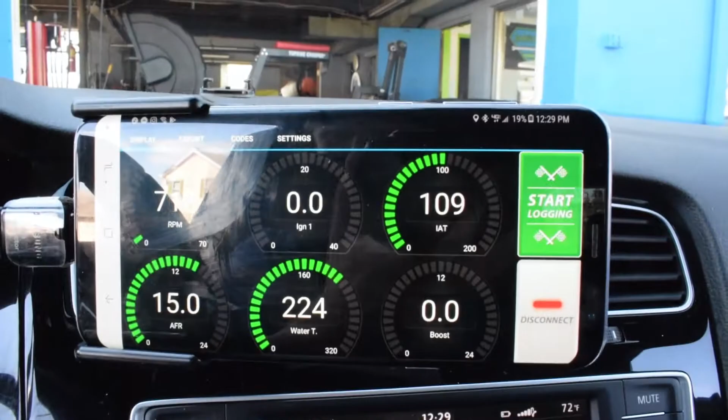So right off the bat, this is beforehand - I've been driving around, just a normal daily commute. So just sitting here, we're resting at about 110 IATs as far as resting goes. It is 72 degrees out, and now we're going to install the turbo blanket, and then I'll give you the afters on the IATs resting and my impressions.

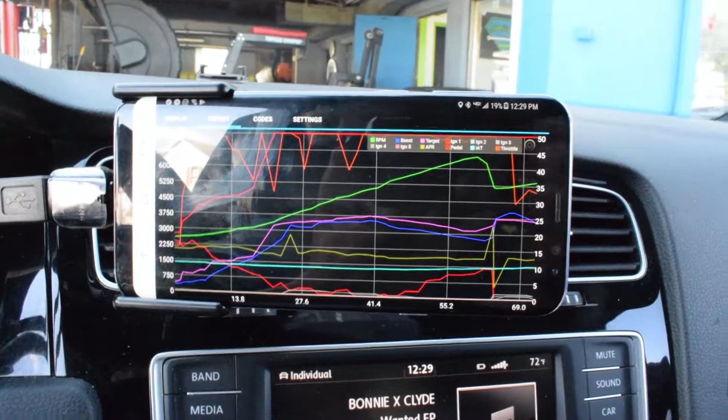But this is a log that I ran pretty much like 10 minutes ago when it was heat soaked pretty good. This is on my high boost map too, so this is the map that I'm going to be running at the track next, but I'll be with ethanol, whereas this isn't right now.

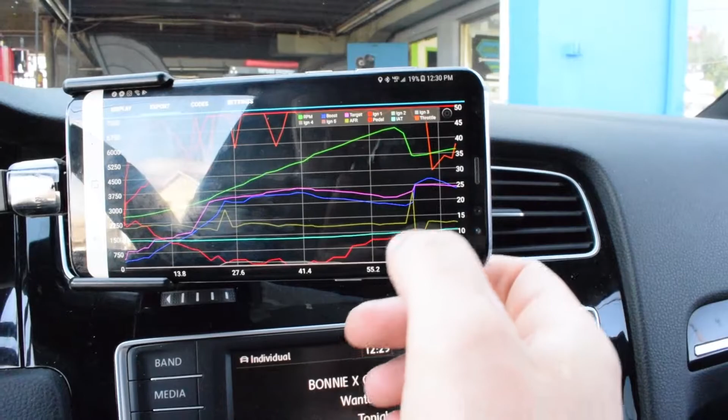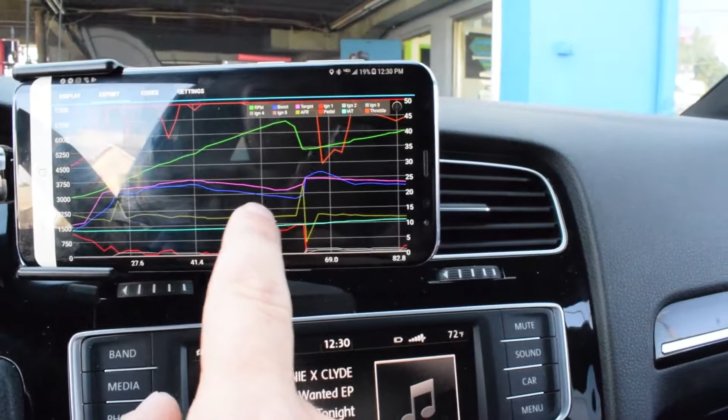So this red line is what we're going to use to determine if this turbo blanket helps out, and then the blue line here is the IATs. This was third gear and then fourth gear, so you can see some timing corrections, some timing pull, same thing going on here. But like I said, the car was heat soaked already, so I'm hoping the turbo blanket will alleviate some of the heat soak for multiple runs at the track.

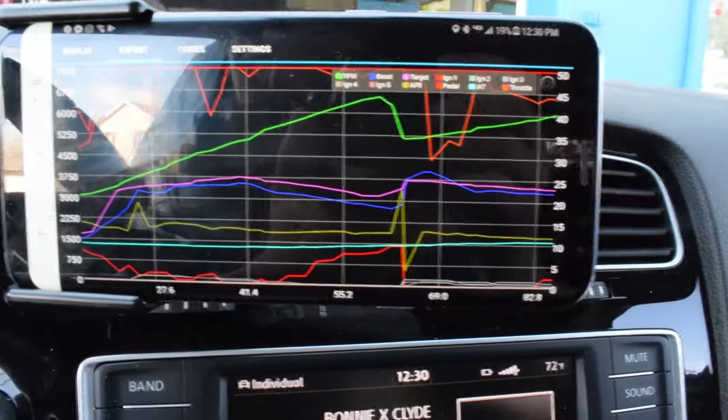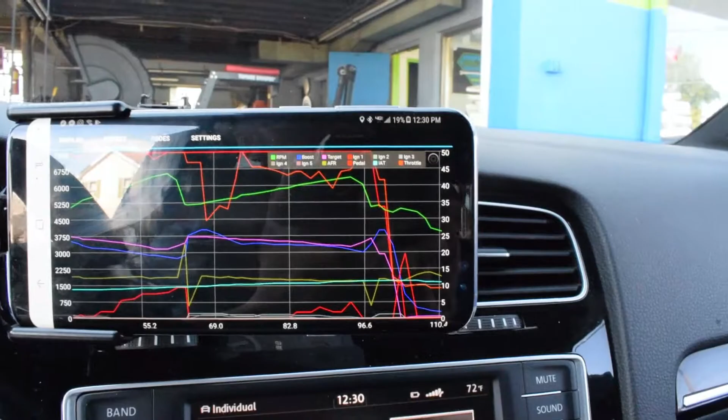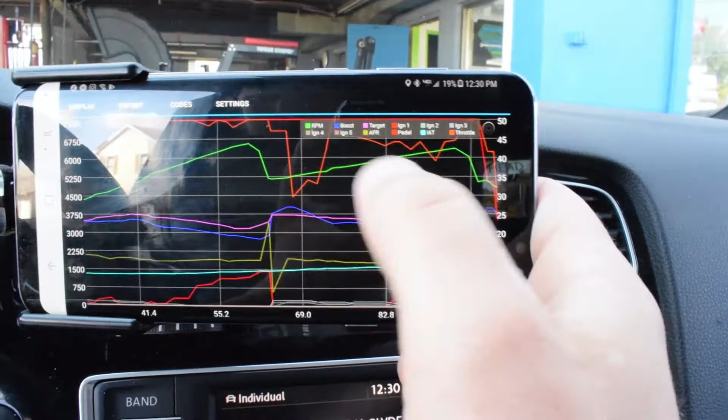I know that initial run it's not really going to change much, but if it'll help not get heat soaked - and also going into the winter, I plan to run this map all the time, at least until we get back into the 70s in the spring. So I want the turbo blanket to help out with commuting and keeping the IATs down throughout my whole journey, wherever I go over the winter. So let's see what it does.

So this is what the turbo blanket itself looks like from Forge. Definitely good quality make, feels nice and sturdy, good materials. So let's get it installed.

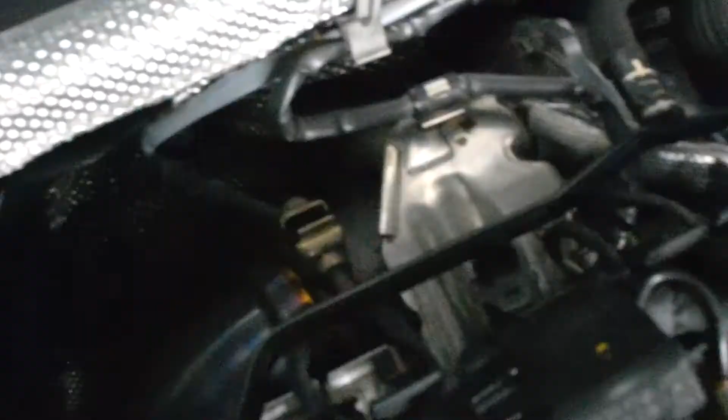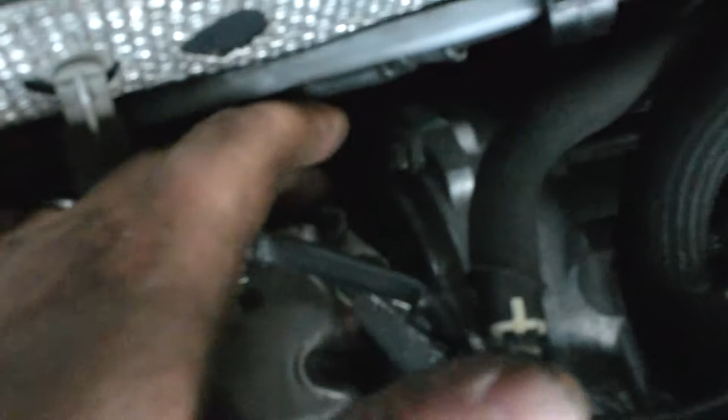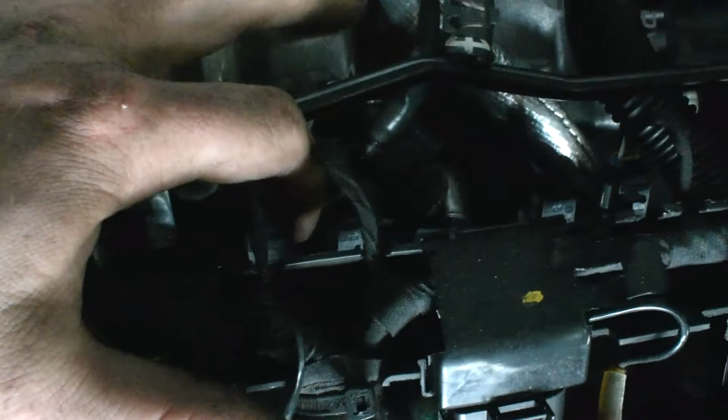Alright guys, first things first, I'm going to take off this heat shield. There's one bolt in front here, one bolt in front over there, there's a bolt right up top here, and then there's two kind of right down in here, so there's one down here, and then there's one in between these two plugs here. Alright, so heat shield's out.

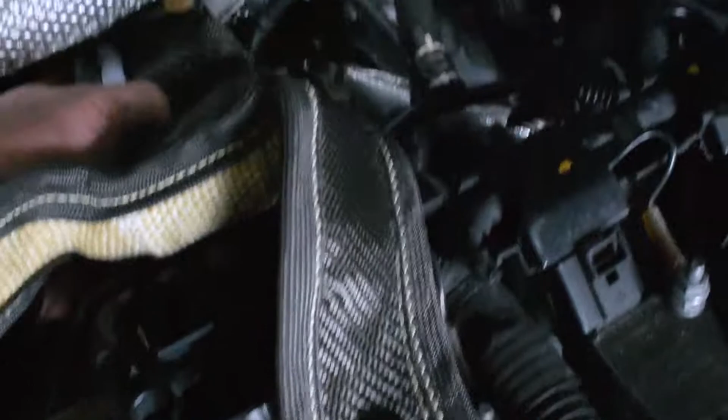Alright guys, so here's what the turbo blanket looks like. This snaps on right here. So what you got to do is you're putting this on first without that piece. You're tucking it back, and then these will go down and around the actual part of the exhaust that comes out of the engine.

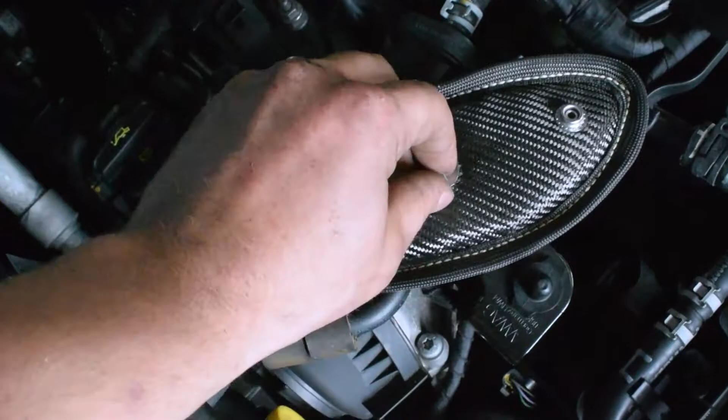So the exhaust manifold there, and then the other side will wrap around where the O2 sensor is, and you just push those down and under. Once they get under, then we're going to put this piece back on the snaps, and there's two springs that get hooked to here, and there's also one on the other side of this, so they'll get hooked together underneath.

So to make life easier, we're going to take out the O2 sensor up top, so we can get the full wrap all the way around without anything being in the way of it. So O2 sensor out, that way you can go right up to the edge of the exhaust manifold there where it splits on the Forge blanket.

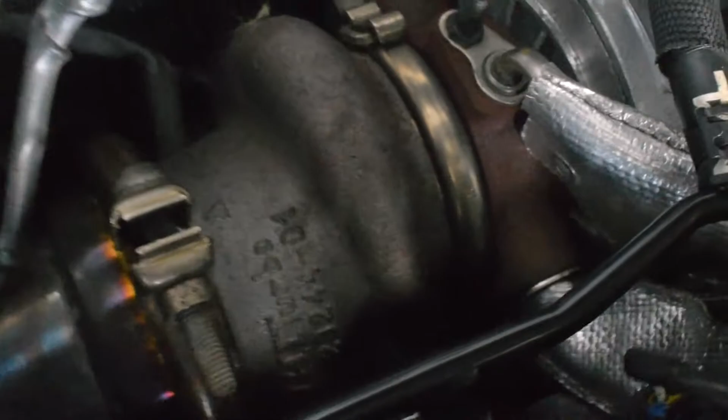Alright guys, so I have the blanket fed under. So I took out the O2 sensor. There's the split in the blanket, so we push that down here - one going on one side of the exhaust manifold that's coming out, the other going on the other side. Then on this side that's easier to get to, this side split, I put on the bottom piece that had the buttons on it for the bottom of the blanket, and then reached my hand down and under and connected it. So basically I spun this all the way forward as most as I could, so I could get under there and be able to snap in the other side of that bottom piece of the blanket.

So I've done that. Now I'm rotating back. I'm just going to get it fit real nice and snug, and then throw in the O2 sensor again, and that's it. It's done.

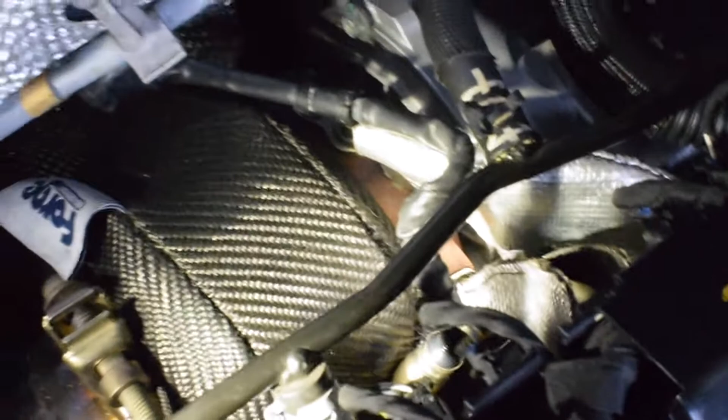So I got my turbo blanket in, and I got my O2 sensor back in. That was a pain in the ass to get back in because it's so tight now with the cloth in there, so just be wary of that. And then now what I'm going to do is move my bracket here, spin it so that I can actually encompass this too with the cover.

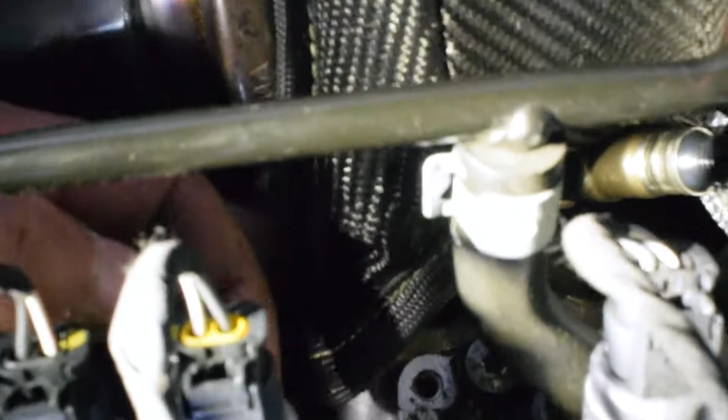Alright guys, so I spun my downpipe clamp so that, I don't know if you can see it at all, that's down there now. So basically it's running right next to the engine, so that way I can pull my blanket over so that it nicely covers the whole side as well.

And that's it guys, so that's on there. Just want to make sure everything's covered up, that's supposed to be covered up with it. And that's it, so that's on. Obviously you're not putting your heat shield back on, I don't see why you would. It's essentially doing the job for it.

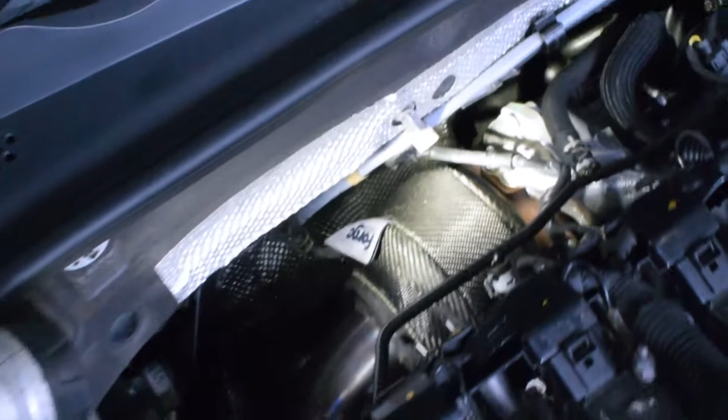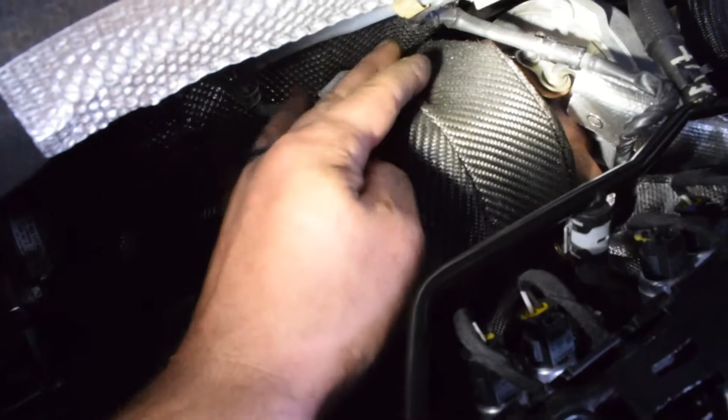So for the springs, what I did is after I put the two splits down and buttoned on the second piece down the bottom, the springs are down underneath of this. So I spun this as far forward as I could so that I could get to the back of it, then put the springs on the bottom piece first, pulled them up to the top, and then spun this back so that it fits where it's supposed to fit. And that's it guys, now we're going to do the heat test part of it.

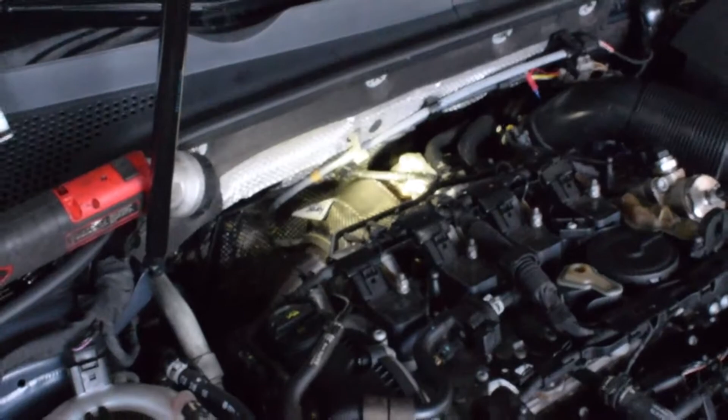Gonna drive the car around a bit again, let it get heat soaked, and see what happens on our logs.

Alright guys, so after you're done, like I said, you're not going to put the heat shield in, but the part of the old shield right here, I would put at least that bolt back in. But what I'm going to do is actually put all my bolts back in where they were, that way if I ever need to undo this, they'll be right where I left them.

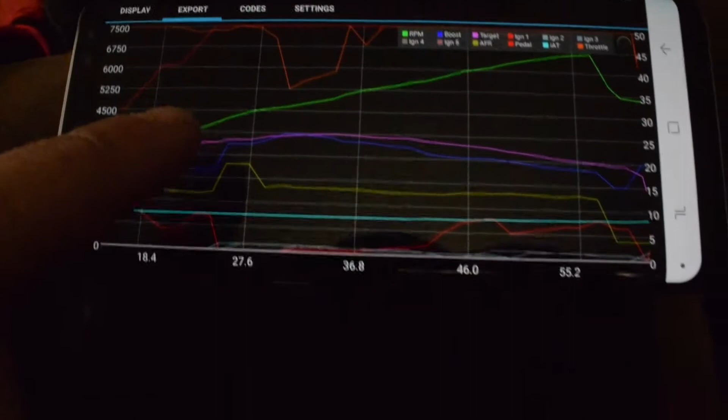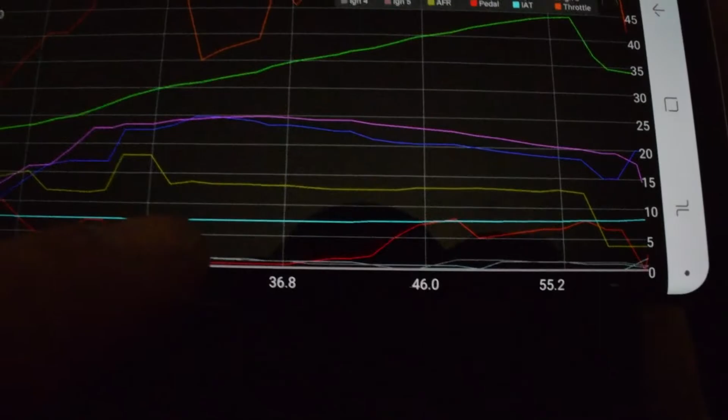So here's our after log. You can see the intake temps are definitely down, probably more around the 80s to 90s, whereas before they were closer to 100. The car definitely is different in terms of heat soak, so it takes longer for the car to heat up at a stop, and it's quicker for the car to cool off once you start moving again.

Before I did this, cruising down the highway, just cruising, my IATs tend to stick 20 degrees above the outside temp. Now they sit around 10 to 12 degrees above the outside temp, so it definitely brought them down as far as a cruising aspect is concerned.

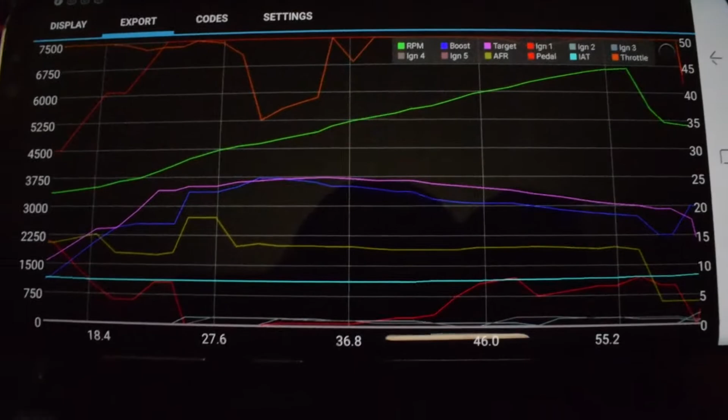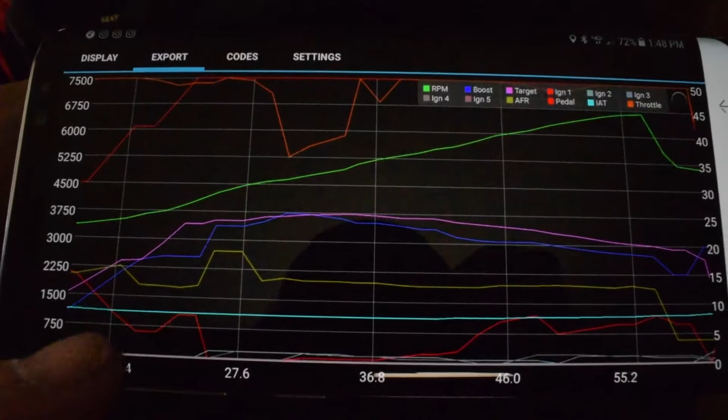And yeah, so all around I'm happy with it. I think it's a good $50 well spent, definitely helps. Now obviously I'm taking these on a heat soaked, from being already heat soaked, so I am going to have some timing corrections, so don't mind that. I was probably driving for about a half hour before I did this, but the point is the intake temps you're getting after that point are definitely lower than they would have been without the turbo blanket.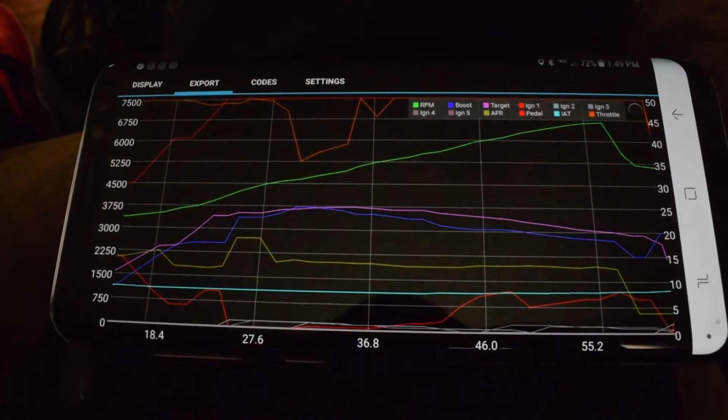So when you're looking at intercoolers, you're talking upwards of $600+ to get an intercooler. If you're nowhere near that budget, which I am not, you can easily put this on for $50, $60, and it will help. As far as making the intake temps cooler during the run, it's not going to help with that, but as far as combating heat soak, it definitely helped. So I say go for it, $50 well spent.